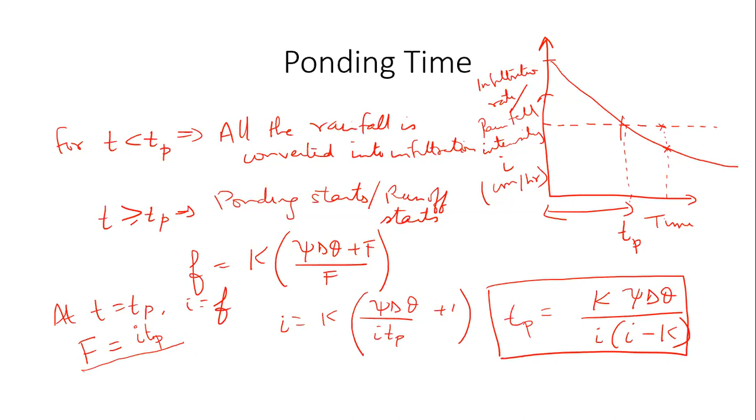And since until that time, whatever rainfall has fallen has all become infiltration, capital F, the cumulative infiltration, is simply I times Tp. So you put that into the Green-Ampt equation and I get this expression, I equal to K times psi delta theta divided by I Tp plus 1. Then you rearrange this and you get the expression for the ponding time. So if there are no questions, let us solve one problem, which might give you some very good insights into what this physically means.

Compare the ponding time and the depth of water infiltrated at ponding for a silt loam soil of 30% initial effective saturation. It's a continuation of the same problem. The problem that we solved in the previous class was for a silt loam soil with an initial effective saturation of 30%. So whatever values we got in the previous class, we'll continue to use in today's class also. It's the same silt loam soil, and the effective saturation Se is the same, 30%.

Subjected to rainfall intensities, two different rainfall intensities are given to you. One is 1 centimeter per hour and the other is 5 centimeters per hour. Okay, so this time Tp, what is it?

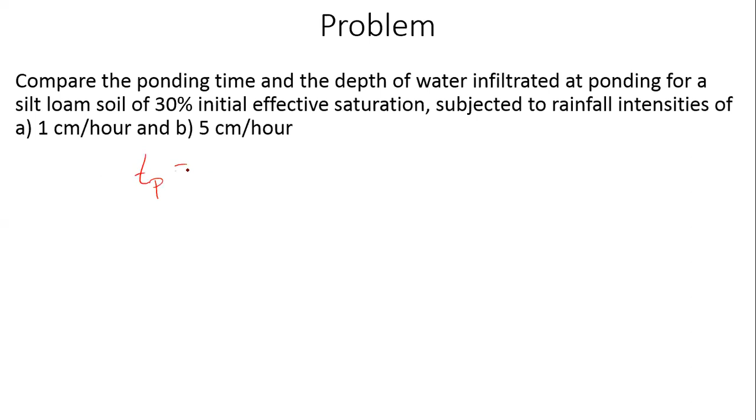K psi delta theta divided by I into I minus K. This is the expression that we have. Okay, do we have all the information required to solve this problem? In the previous class, we obtained the values of K and psi delta theta and so on. Do you remember that? Right, I'll just quickly go back to the previous.

Yeah, so this was the problem that we solved in the last class, where we obtained, for this given information, silt loam soil with an effective saturation of 30%. All these parameters were obtained from that table that was available in the textbook, right? And then we obtained the cumulative infiltration and the instantaneous infiltration after 1 hour.

Okay, but for this particular problem that we are interested in solving, we need these values K, we need psi 16.68 centimeters and delta theta, which was 0.34, I think. 0.34, yeah, and then psi delta theta is 5.68 centimeters. Okay, so let's go into this problem. So in this problem, K is known, right? So K is 0.65 centimeters per hour. Psi delta theta that we obtained in the last class was 5.68 centimeters.

Okay, so now we have all the information. Can you quickly just input all these numbers and obtain for me the ponding time for these two rainfall intensities? I of 1 centimeter per hour and I of 5 centimeters per hour. Right? Everything is available in front of you. Can you quickly solve this? Tell me the TP for part A and part B. For I equal to 1 centimeter per hour.

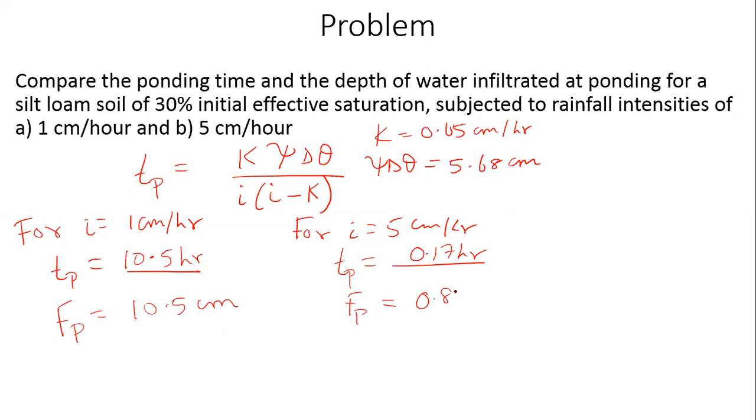Please bring your calculators, everybody. It makes no sense to come to a class without your calculator.

Okay, so now look at this. Was this something that you expected? Look at the answers that you've gotten. Just think about the physical significance of this. I have two rainfall events, one of 1 centimeter per hour and the other of 5 centimeters per hour on the same soil sample with everything being identical. The time of ponding doesn't actually tell you a whole lot because you're not able to physically visualize it. But when you compute the cumulative infiltration, look at the numbers that you're getting.

In case A, when you received only 1 centimeter per hour, assuming that the rainfall continues for 10 hours, right? So this TP is 10.5 hours, assuming that rainfall intensity continues for 10 hours non-stop. So if that happens, in those 10.5 hours, you would have obtained a cumulative infiltration of 10.5 centimeters. So 10.5 centimeters of water would have infiltrated into the soil in case A, 1 centimeter per hour. If you have case B, which is 5 centimeters per hour, you have 5 times as much rainfall.

Okay, but in 10 minutes, you start to get ponding. And in those 10 minutes, only 0.85 centimeters of water has gone into your soil. So then, what does this mean? It is better to have, yes, yeah, go ahead. What is that?

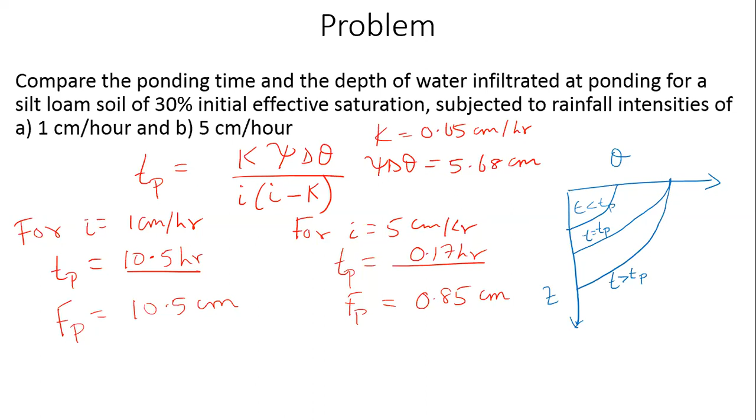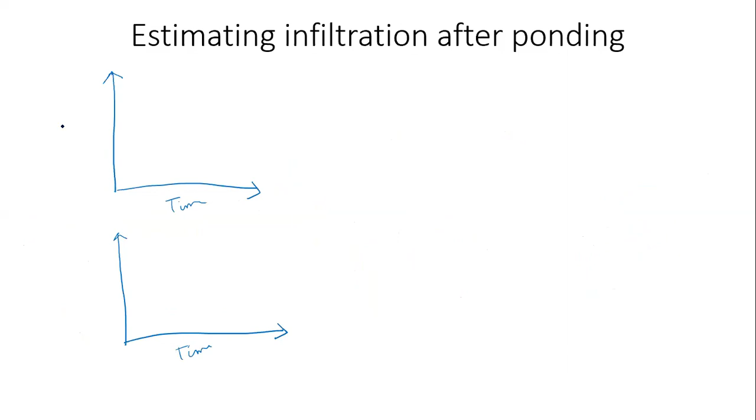Good. So now we are trying to understand what happens to infiltration after ponding happens. In the first graph, on the x-axis, I have time. Both will be time. On the y-axis here, I have the instantaneous infiltration rate, and here I have the cumulative infiltration. So this one is, let's say, centimeters per hour, and this one is in centimeters.

Let me draw what the rainfall intensity is. Let's say the rainfall intensity is constant and continuing indefinitely. Until time t equal to tp. Let us say this time corresponds to time t equal to tp. I'm going to draw this. Oh, I'm sorry.

So I'll draw this the same time t equal to tp. This is rainfall. So this is I. Okay. Now the question is, what happens after time t equal to tp has been reached? So this is time tp. So if I were to draw cumulative infiltration as a function of time, what will it look like? From 0 to tp?

Straight line passing through 0, and slope equal to I. Slope equal to I. Yeah, fair enough. So this number equal to I times tp. Is that correct? So it has reached a value of I times tp at the end of time t equal to tp. Right? This is how we have understood the process up to tp.

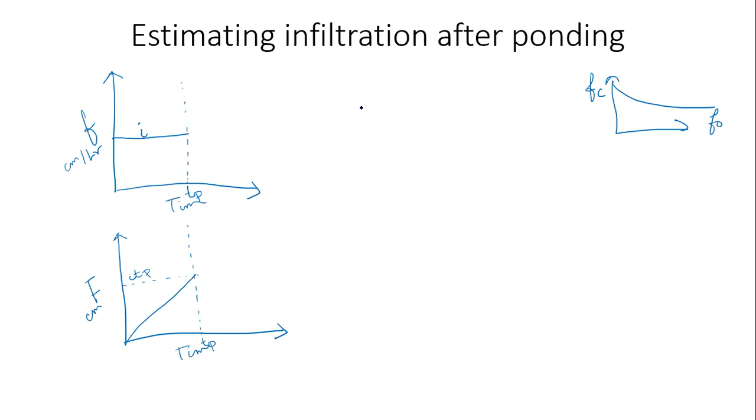Okay. So then after this time t equal to tp, this is the point at which I and f intersect, right? Let's say I is some constant over here. Okay, if I bring the same curve back to here, after time t equal to tp, the curve should look something like this. Sorry. Yeah. So the curve should look something like this. Agreed? So this should be the actual infiltration rate.

My question is, I want to find out what this curve looks like. Okay, I've drawn it a little bit incorrectly. It should asymptotically approach some constant value. The curve doesn't look quite right, but just assume that it is asymptotically approaching some constant value as time goes on. Okay, now can I not extend this backwards in time? Okay, let us first look at what cumulative infiltration will look like. Remember that so far we are assuming that rainfall will just continue at the same rate indefinitely. This same intensity of rainfall keeps happening indefinitely for all time.

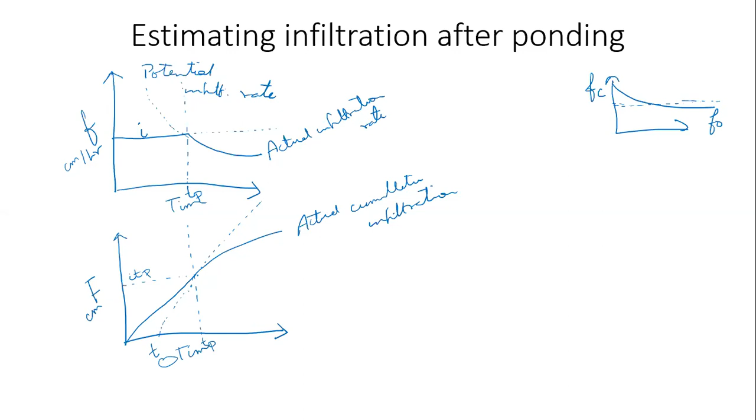So t naught is the time which is telling us at what point this curve will intersect the x-axis or the time axis. You can think of it physically as some kind of time. This t naught is the time from which, if infiltration had started at that time, it would have still reached the same time of ponding, and the same amount of infiltration would have happened by time t equal to TP. Now physically, what does this mean? Sir, didn't get it, sir. Yeah, I'll try to explain it physically.

So this t naught is basically the time from which infiltration had started. What is the original time at which infiltration started? 0. From 0 to TP, you have got a cumulative infiltration of FP, FP equal to I times TP. But if infiltration had happened at this rate, at this dotted line, then you would have got cumulative infiltration happening along this dotted line, right? If infiltration had happened at the potential of that soil, naturally you would have achieved the same amount FP in a shorter time duration, correct? Yes. So what took from 0 to TP to accomplish could have been accomplished from T naught to TP if the infiltration had happened at the potential infiltration rate.

Physically there's no other way to explain it. So this T naught is the time. You can think of it as shifting the origin. Instead of starting at time t equal to 0, I've shifted my time to another time t naught, from which, if infiltration had started at the potential infiltration rate, I would have still accomplished whatever infiltration I have accomplished by time t equal to TP. The same cumulative infiltration and the same infiltration rate would have been reached if my infiltration had happened at the potential infiltration rate at every given point in time. So that's a way to think of it physically.

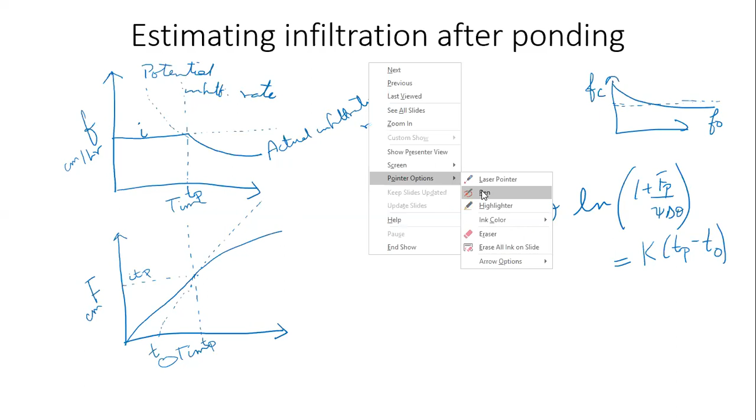Let me erase something over here. So FP minus psi delta theta log(1 plus FP by psi delta theta) equal to K into (TP minus T naught). This is the cumulative infiltration that has happened up to time TP, assuming that it had happened at the potential infiltration rate. So this is for T equal to TP. For T greater than TP, what will the equation look like?

The equation will simply be F minus psi delta theta log(1 plus F by psi delta theta) equal to K times (T minus T naught), for any time T greater than TP, assuming that it has started from T naught instead of at time T equal to 0. All I'm doing is shifting the origin from T equal to 0 to time T equal to T naught, and rewriting the expression, still keeping the absolute time T, which starts from 0, and introducing this new origin T naught. Nothing fancy is happening. Now, if you subtract these two equations, you will get rid of this T naught, and you will get an expression.

I'll write the final expression. I don't want to go through all the steps. So the final expression, after subtracting, you will get F minus Fp minus psi delta theta natural log of F plus psi delta theta divided by Fp plus psi delta theta equal to K times T minus Tp.

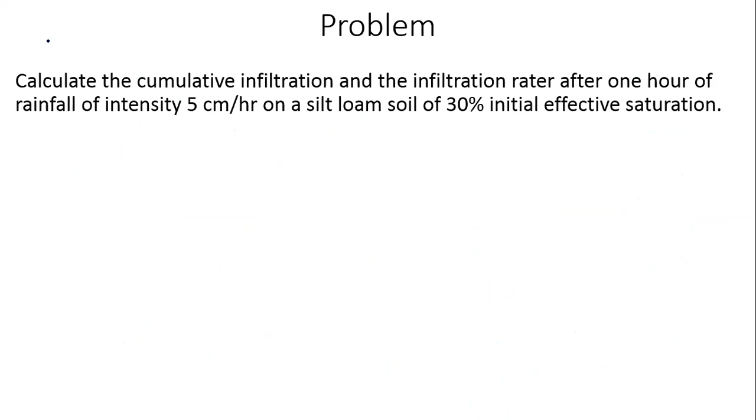So K is known. K is 0.65 centimeters per hour. Tp, what was Tp for this 5 centimeter per hour? We just solved it. 0.17 hours, 10 minutes. What else do we need? We need psi delta theta. Psi delta theta equal to, I think, 5.68 centimeters. So now we have everything required to attempt to solve this problem. What is F at t equal to 1 hour, and what is small f at t equal to 1 hour?

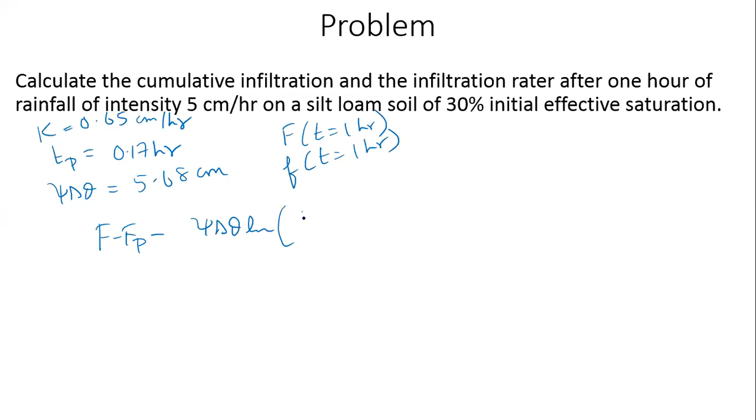So we put that into that expression: F minus Fp minus psi delta theta natural log of F plus psi delta theta divided by Fp plus psi delta theta equal to K times T, which is 1 hour, minus Tp, which is 0.17 hours. So now again, you do the same successive substitution.

I'm sorry. Oops. Oh God.

Yeah, you're able to see the screen? It's gone, right? I'm sorry. You're able to see the screen now?

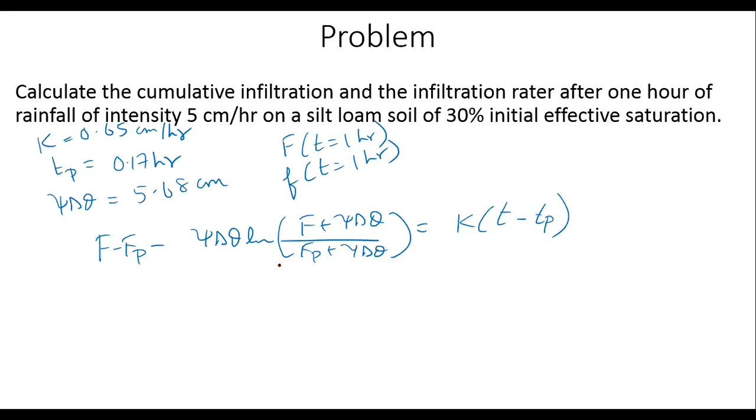Yes, sir. Okay. So let us quickly, so you do the substitution and then you get capital F equal to... I'll not go into the iterative approach. You can very easily solve it. Now in this equation, the only unknown is F, capital F, right? Capital T is given, 1 hour. TP we solved in the previous problem, 0.17. Psi delta theta is known. K is known. K is required on the right hand side.

So you simply solve for F iteratively. You obtain this value, capital F equal to 3.02 centimeters. This is taking into account the fact that ponding happens after 10 minutes, after 0.17 hours, right? Then you solve for your small f. Small f is simply K times psi delta theta by F plus 1. So you know K, you know psi delta theta, you've just obtained capital F. So you put all the numbers in, you will get your infiltration rate, instantaneous infiltration rate, 1.87 centimeters per hour.

Okay. Now, if you remember, when we solved the previous problem without taking time of ponding into account. Do you remember? Shall I just go back to the... this was the problem that we solved, right? Oh, did I not give the rainfall rate? Oh, water is ponded. Yeah. So in this particular case, we did not take into account rainfall intensity, right? We assume that the water is ponded to a small but negligible depth on the surface, right? For the same soil, after 1 hour, how much infiltration had happened? Look at the answer.

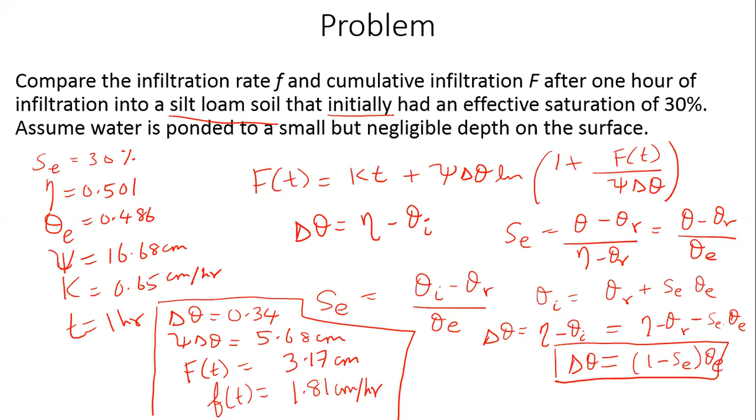What is the difference between this problem and that problem? Only one difference. Here we are assuming that even from time t equal to 0, there was ponding at the surface, right? So for the entire 1 hour, there was ponding at the surface, and then you got a cumulative infiltration of 3.17 centimeters. But when I take into account time of ponding and then solve the same problem with the rainfall intensity, I find out that I actually get less infiltration happening into the soil sample. So what does this tell you?

In the previous problem, from time t equal to 0, there was ponding at the surface. Here, ponding only starts after 0.17 hours, right? What is ponding essentially? Ponding is basically an infinite source of water, right? In the first 0.17 hours, all the infiltration was happening because of rainfall, right? But in the previous problem that we solved, there was an infinite source of water at the surface. So naturally, you had more infiltration happening in that previous problem.

But here, in fact, I would rephrase that. In the previous problem, the soil had the ability to infiltrate water at its potential infiltration rate. Here, it was limited by the rainfall intensity. Does that make sense? Yes. Right. So here, there's a rainfall intensity of 5 centimeters per hour. What if the soil had an ability to infiltrate water at 6 centimeters per hour? In this problem, you are not given that option, because the rainfall intensity is prescribed.